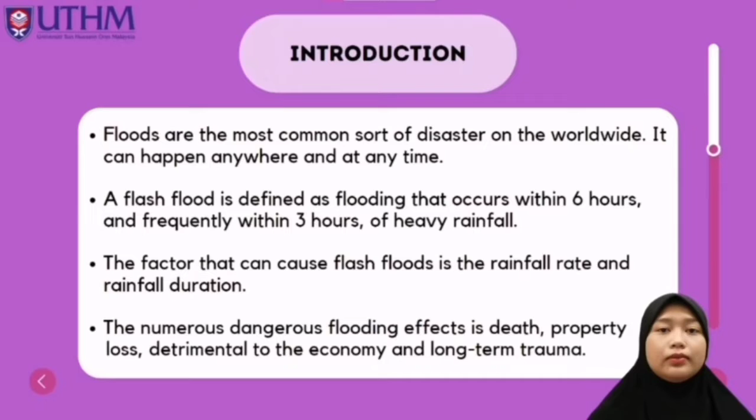So today I will present about the issue of any reason for the occurrence of flood. A flood is defined as an overflow of water onto normally dry land. Floods can happen almost anywhere and anytime. Floods can cover an area in a few inches of water or bring enough water to cover the roof of a house. Floods can be harmful to communities because they can last for days, weeks, or even a month.

A flash flood can be caused by a variety of factors, including prolonged rainfall, heavy rainfall, overflowing rivers, cracked dams, a lack of vegetation, channels with steep banks, and ocean waves coming onshore. Geography may dramatically enhance the likelihood of floods in a given area. Flash floods are more likely in areas close to rivers and towns.

As previously said, flooding may be caused by a number of factors. While the causes of different types of floods vary, the majority of floods are triggered by one of the following acts. This slide explains one of the reasons for flood, which is prolonged rainfall.

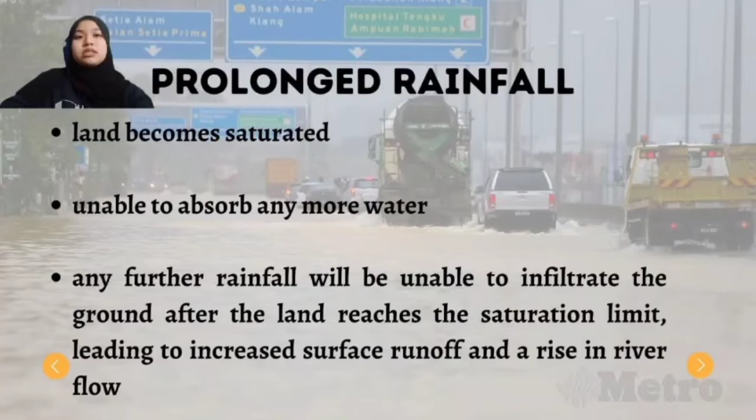When prolonged rainfall happens, the land becomes saturated. The land is unable to absorb any more water. Any further rainfall will be unable to infiltrate the ground after the land reaches the saturation limit, leading to increased surface runoff and a rise in river flow.

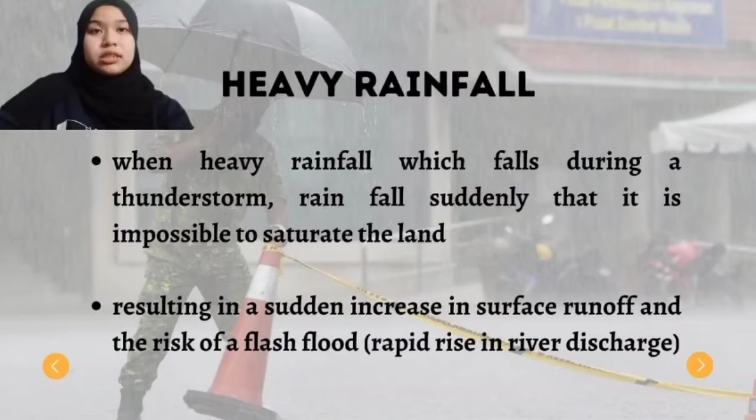Heavy rainfall, which falls suddenly during a thunderstorm, makes it impossible to saturate the land, resulting in a sudden increase in surface runoff and the risk of a flash flood, with a rapid rise in river discharge.

The next slide is about overflowing rivers. Flood happens due to overflowing rivers. River flooding is not always caused by severe rainfall. It can occur when there is debris in the river or dams that prevent water movement.

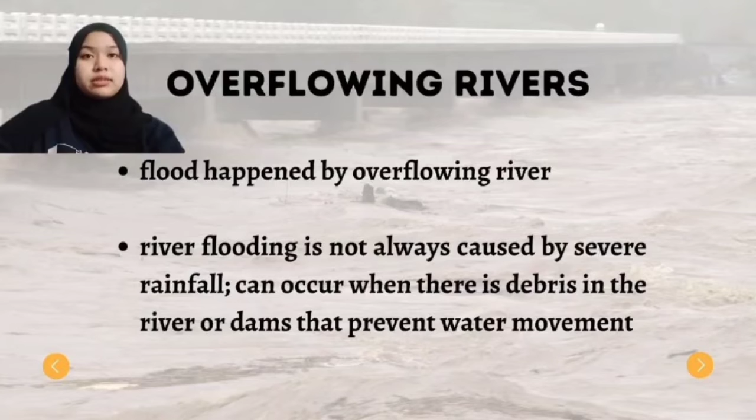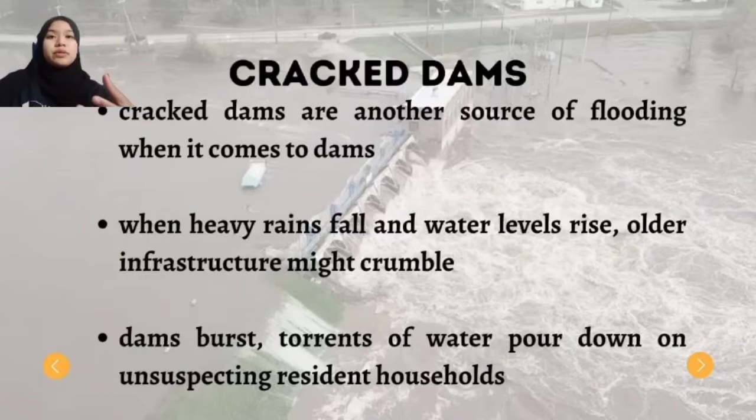Cracked dams, which is one of the reasons for flood. Cracked dams are another source of flooding when it comes to dams. When heavy rainfall occurs and water level rises, the infrastructure might crumble. Dams burst, and torrents of water pour down on unsuspecting residents' households.

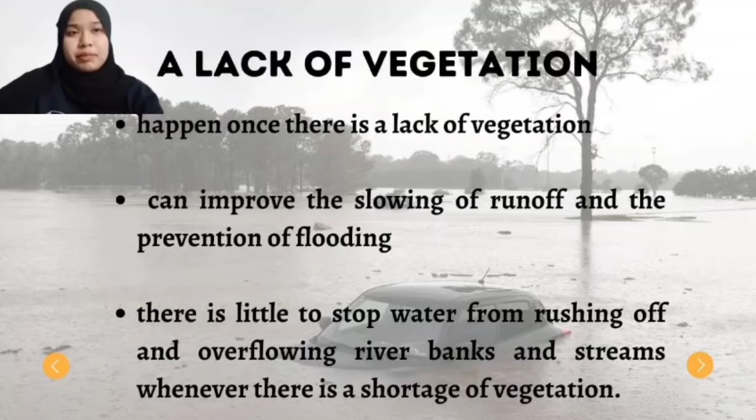The next slide is about a lack of vegetation. Flash flooding happens once there is a lack of vegetation. The importance of vegetation is that it can improve the slowing of runoff and the prevention of flooding. There is little to stop water from rushing off and overflowing riverbanks and streams whenever there is a shortage of vegetation.

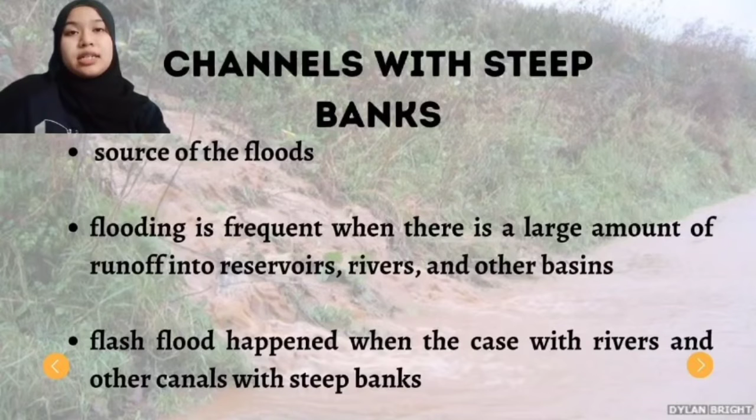This slide explains about channels with steep banks as a source of floods. Flooding is frequent when there is a large amount of runoff into reservoirs, rivers, and other basins. Flash floods happen in the case of rivers and other canals with steep banks.

The last reason is ocean waves coming onshore. A storm surge also causes flooding. Storm surge, which means an unexpected rise of water, occurs during major tropical storms. Then water levels rise. Dangerous floods can occur along the shore. Storm surges are not the same as high tides, but when one occurs at high tide, water levels might rise much higher. Water level sometimes increases by 20 feet. That doesn't mean there's one 20-foot wave that recedes fast.

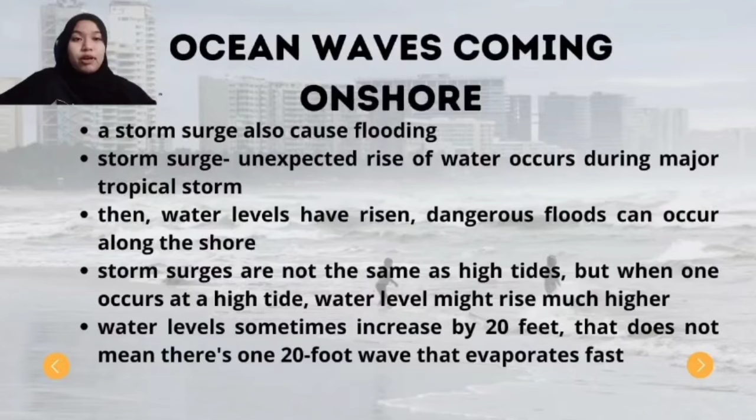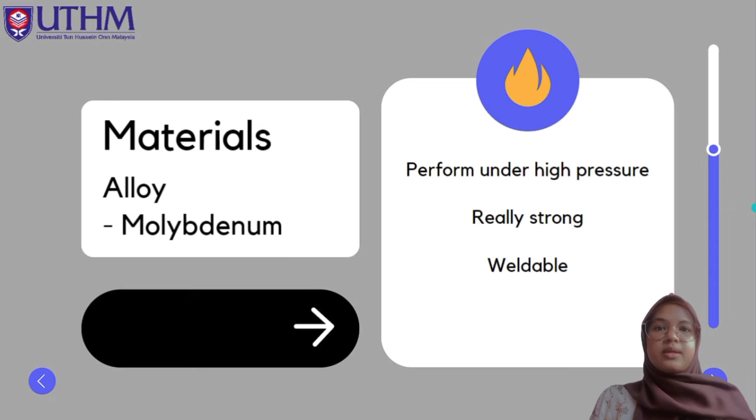The material we choose is from alloy, which is molybdenum. The material used needs to be suitable for the required condition because it will be used under water. Pressure is always an issue at the ocean, river, or even a small drain. The chosen material, molybdenum, is well known in nature to perform under high pressure, which is why most construction involving water uses this material. Although well known for its strength, this alloy material is still adaptable and can be easier in the design process.

Next, the material we use is glass, specifically laminated glass. In every design of the construction process, there is something we call aesthetic value, which is important because people love something eye-catching in every design. Laminated glass is formed from two plies of normal glass. As before, in the water there is high pressure, especially during overflow of water, which can cause flooding. So laminated glass provides greater thickness and durability when overflow of water from the river happens.

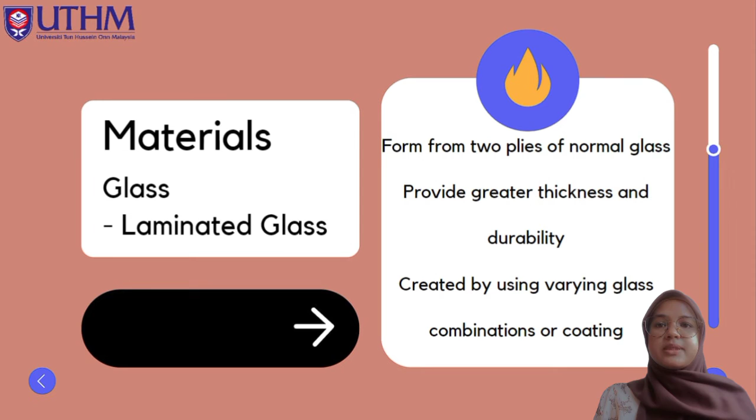In choosing the material, the making process itself needs extra attention. However, there is nothing to worry about with this laminated glass material because it can be created using varying glass combinations or coating. Now I will talk about the process.

First, dig the side concrete, which is 200mm along the river, using the jackhammer. Second, the ready alloy and glass from the factory are put into the hole we made earlier, using a crane. Next, use an anchor bolt to tighten the concrete surface with the alloy, using a hammer drill, which can be bought or rented.

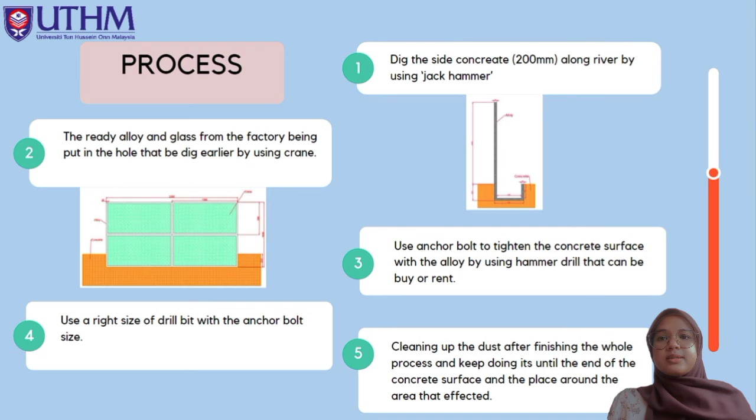Next, use the right size drill bit matching the anchor bolt size. Lastly, we need to clean up the dust after finishing the whole process and keep doing it until the end of the concrete surface and the affected area around it.

Lastly, the method. First, we make a group discussion with other group members to decide the design. Next, we start making a draft drawing and choose the most suitable one for the required conditions. Next, we get the exact number of flood mitigation units needed. We make a survey of the covered area.

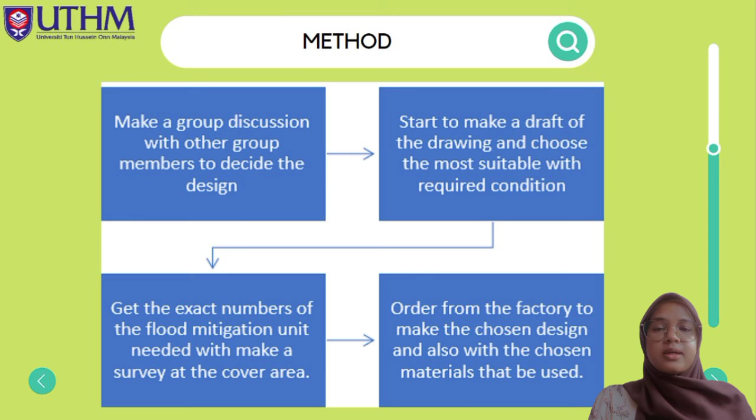After that, we order from the factory to make the chosen design and materials that will be used. Next, the flood mitigation design is finished with the ordered numbers. After that, the product is transferred to the work area using transportation.

Next, we use a suitable size crane to put the flood mitigation product into the dug concrete. Lastly, as I said before, we need to finish by cleaning the work area. That's all from me, thank you.

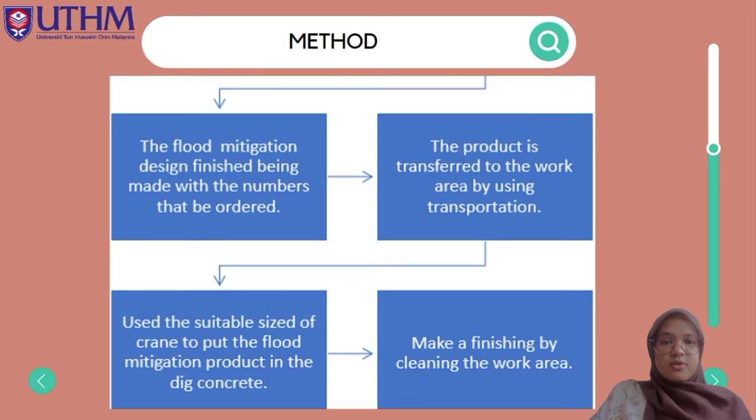For technology, we use four technologies for our project. The first is the jackhammer, used to destroy concrete, remove pavement, and demolish a variety of other surfaces, commonly used in construction as a hammer to smash hard surfaces or rock.

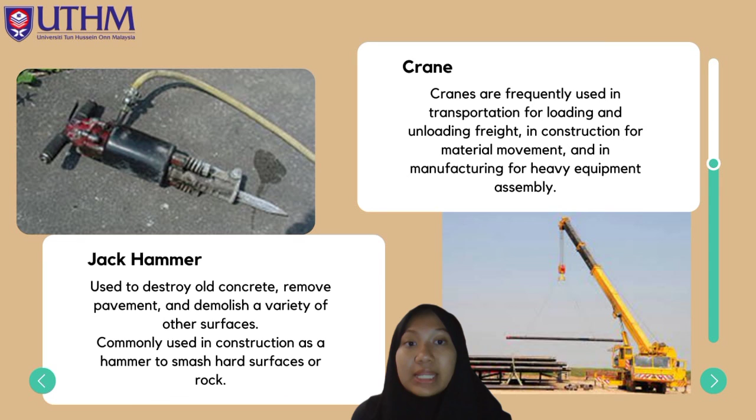The second is the crane, frequently used in transportation for loading and unloading freight, in construction for material movement, and in manufacturing for heavy equipment assembly. The third is the anchor bolt, used to connect structural and non-structural components to concrete.

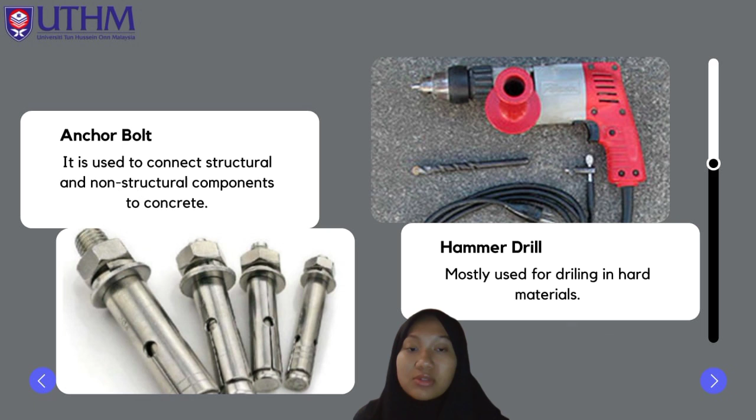The last technology is the hammer drill, mostly used for drilling in hard materials.

Next, I will present the conclusion. Flooding is the leading cause of death from extreme weather and also causes long-term trauma for victims. The material used needs to be suitable for the required condition because it will be used under water. Flooding can be prevented if soil condition improves, making water absorption easier.

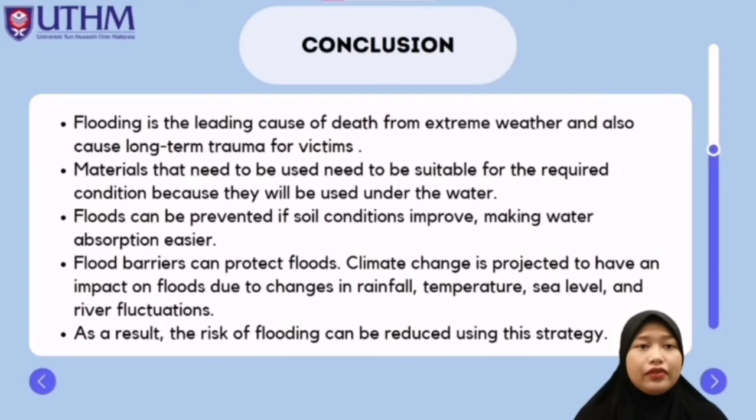Flood barriers can protect against flooding. Climate change is projected to impact flooding due to changes in rainfall, temperature, sea level, and river fluctuation. As a result, the risk of flooding can be reduced using this strategy.